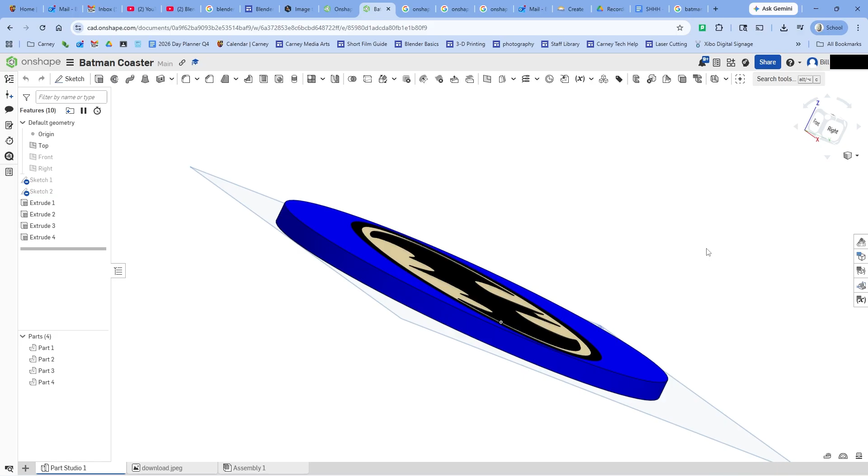All right, we're going to work on our first project inside of OnShape, and what we're going to do is create a Batman coaster. I've already got one here that I made so you can have a look at it. It's a pretty easy thing to do. I'm using the right mouse button just to move around. I can also click up here on top to get it back in the top mode, and you can see there's just a couple of extrusions and a couple of sketches. We'll go through what all that means in just a minute.

So let's go off back to the beginning here. I just clicked the OnShape menu up in the top left, and I'm going to click Create Document, Demo, Batman Coaster. All right, we'll click Create.

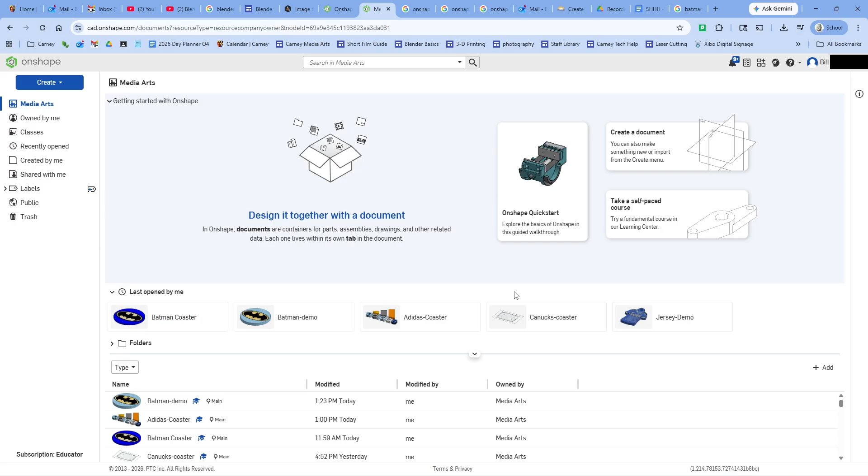So you can see we've got 3 planes that are highlighted here, and the first thing I'm going to do is draw a couple of lines. These are going to be construction lines, and you'll see why these are important in a few minutes. So I click the top, on the top right here, just so I can get in top view. If I right mouse button click, I can move around, but I want to just work in top view for a few minutes here. So I'm going to create a new sketch. Everything has to be associated with a sketch, and sketches must be associated with one of the 3 planes. I'm going to click on top, and now our sketch is ready to go.

You notice it's a totally different menu. So if I click the check mark and we go back to this mode where we can create new sketches, you can see what the menu looks like, but the menu changes as soon as I double click and go into a sketch. So this is basically our edit mode now.

I'm going to draw lines, 2 lines, and again, you're going to see why in a few minutes. Then I'm going to hit Escape, select the line tool again, and draw a line over here as well, drawing a line on top of lines. Then what I'm going to do is select those lines, and I'm going to click up here to turn them into construction lines. Notice how they have that sort of dotted appearance, looks like Morse code. I'll click that on both of them, and now I've got 2 X and Y type of construction lines that I can use.

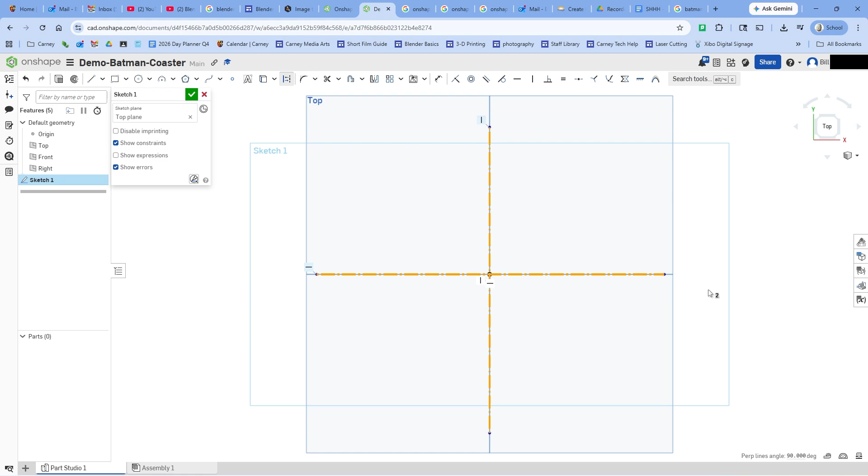Next thing I'm going to do is pull in an image, and the image, of course, is going to be the Batman symbol. So we click up here, Insert Image. And from within the image, there's nothing here yet. We need to import something. Menu appears, there's the Batman logo. And notice it doesn't actually appear here yet. Well, we need to select it, and then we need to drag where we want it, and we can move it around.

I'm going to want to get the size of this because I want to make about a 9 centimeter wide coaster. So this should be about maybe 8 centimeters, at least the image here should be. So I'm going to draw another construction line. I can actually move this up, I suppose, just so I don't get interfering lines. All right, you know what I could do is see if I can move the points on this one. Yeah, that makes way more sense.

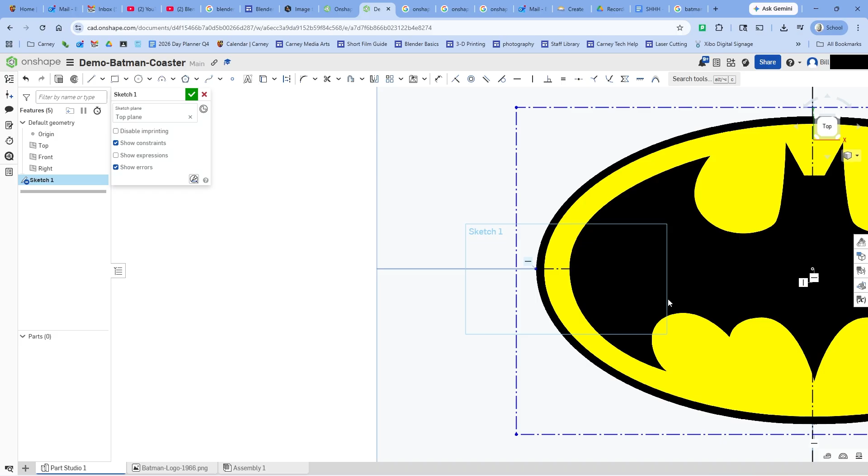Hit the space bar to deselect, you don't want them both selected. Okay, and you can see I need to move the image down most likely. I don't know, maybe right about there. And now we'll do a quick measurement. I could zoom in and try and get this a little bit better. I just hit the space bar to make sure nothing's selected. Okay, pull that one in. And I guess I should have checked to make sure that this is nicely aligned, which it is not. So that needs to be nearly perfectly aligned. That's going to matter, we'll see why in a few minutes.

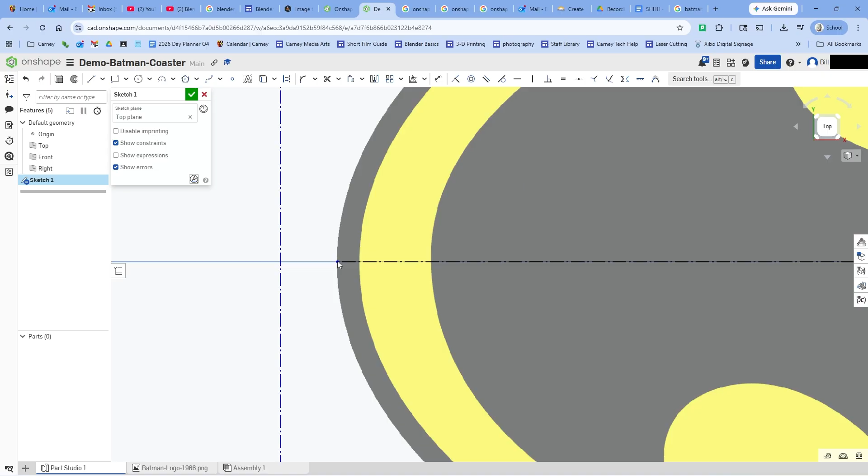Sorry, let's go back and just get these set. We'll get these set. That way we can do an accurate measurement for this thing. Spacebar first, and we'll move that point out. Okay, so we should be good. So let's do a measurement on that line, and what we do is we click on the dimension tool, select the line, and if we pull down, we can see it is set to 95 point. Let's make it 95.8, round up. That shouldn't really make much difference, not any sort of visible difference anyway.

All right, so we got to this point, and we want to now trace on top of this thing. This is looking pretty good. We know the dimensions, we've got the background set. But in order to do that, we want to create a new sketch.

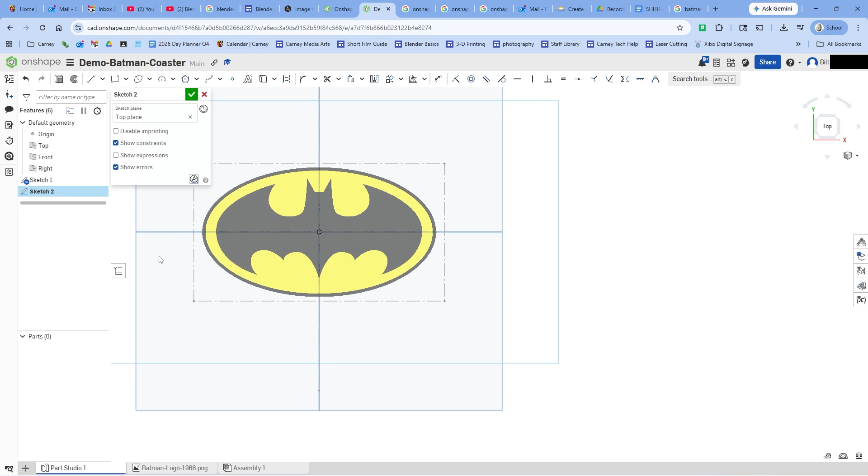The background is on one sketch. Our actual drawing is going to be on its own sketch, and that's important. So the next thing to do is we select a plane for this sketch. Same top plane again, and click OK.

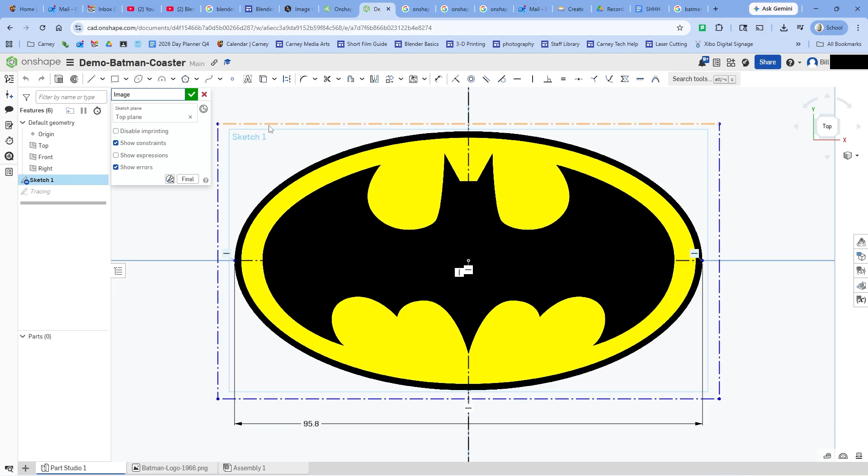Now you can see these are obviously ellipses, so we're going to double click, go back into that sketch. I could just call this tracing, or Batman, or something, I don't know. I'll click check. I'm going to double click this and just name this and call it image.

Tracing. I'm going to select the ellipse tool. You might have it set to center point circle, just click on it, you get a drop-down menu, select ellipse, start from the middle and drag out until we get to the end point. Then it'll give you another chance before you click to make an adjustment, and click. Okay, so we've got one done.

Let's make another. Click the ellipse tool, start in the middle, drag out to here, and try and get this as close as possible. Click again, and we've got our 2 ellipses done. That was pretty easy. We could get fancy here and have a look at the actual sizes and compare the difference to make sure our vertical and horizontal are correct.

So we can go out here, 51, 51.5. Okay, and then I'll select this one, drag it out, 54.3. Okay, so we can see we have a difference of, what is that, 1.8? Is that right, or is it 2.8? Yes.

So then I'm going to check this one, and I want to make sure that's not what I wanted, I want to check this one down here. So let's make sure we select the dimension tool, then click. All right, so we have 95.8. Oh, it didn't like that. Okay, let's just leave it 95.821. And we'll select this one, select the measurement tool. Oops, there we go.

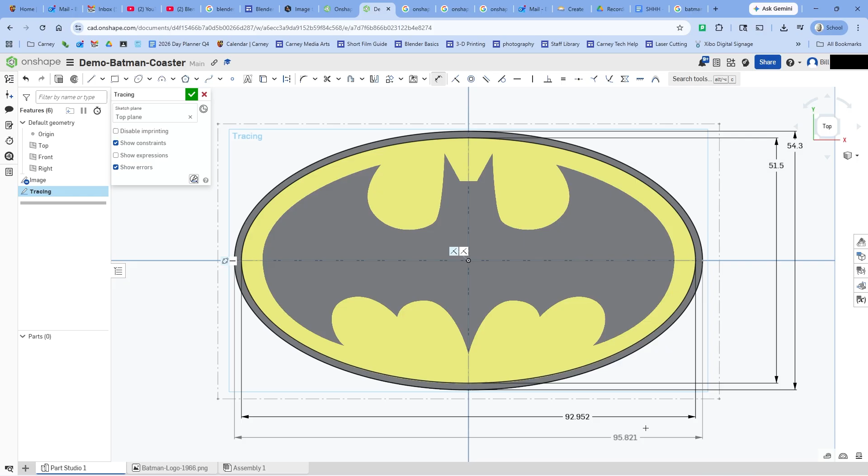And if we want to really be official about this, we should see the same difference between these two, and we can make adjustments so that they're roughly or exactly the same. I'm not going to get into that much detail right now, though.

Next thing we want to do is trace over the Batman symbol. To do that, we click on Spline. I'm going to go here to Spline, click here, and just follow the outline. You can see it doesn't need to be perfect, we can always come back and change these anyway.

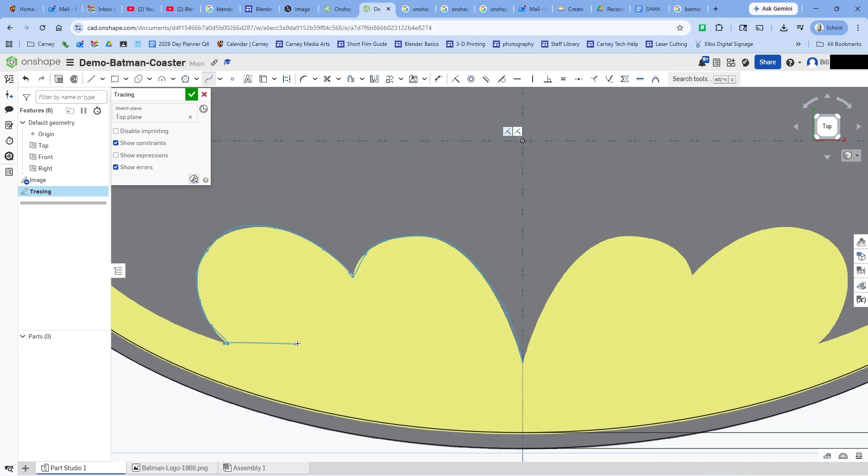If you put 2 close together, you can sometimes kind of fix it. What we really need to do is convert that to a point. Shift middle mouse lets us move. You can see as you go around the curve, it causes the previous curve to kind of bend, which is nice. Shift middle mouse again.

I want to go fairly quickly here, we just want to get this done. Okay, it doesn't need to be perfect. And again, a point quite close to the previous one. We don't need too many points on this.

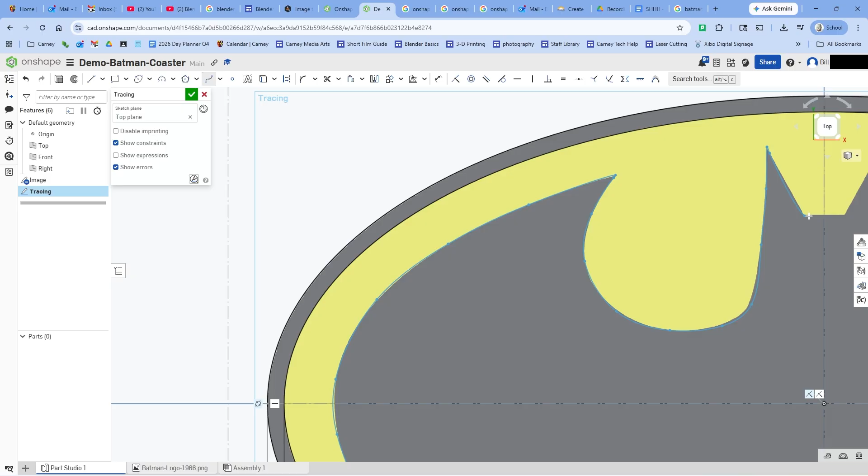The good news is we're almost done because we only need to do half of this. If you notice, it's symmetrical, obviously. Another point there and here. Hit escape, and we've got it drawn.

The only thing is I do want to clean up some of these points. I'm going to hit escape here, select it again, and we should be able to move these points. If there's a few points that are really bothering you, this would be the chance to clean those up. Let's see, is there any other? Most of these look pretty good. Yeah, maybe we'll shift that one a little bit, swing him down a bit.

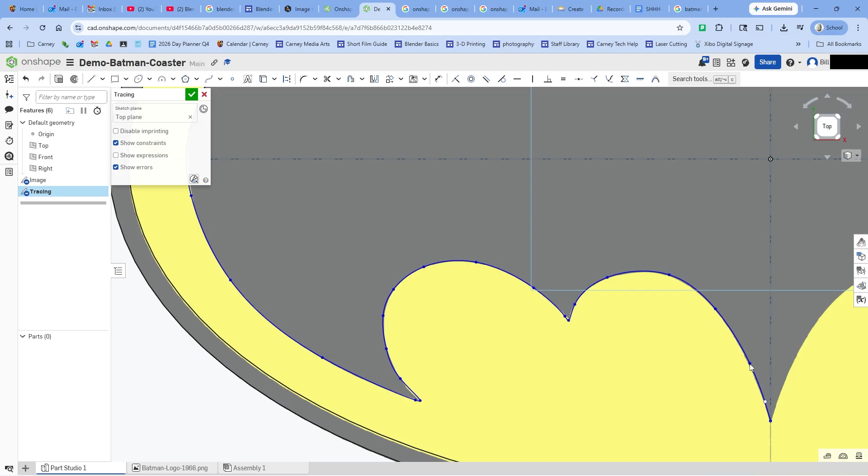Okay, and I mean, you can get really picky if you want to. I'm just going to leave it like that, it's good enough. Okay, so what's next?

Well, this is kind of cool. What we'll do next is use the mirror tool, and it says select a mirror line. So the line that we're going to use as a mirror is going to be this axis down the middle. Then select, oops, there we go. Select entities to be mirrored, it's going to be this line here. We click it, and look at that, we're done. Okay, just like that, it's awesome.

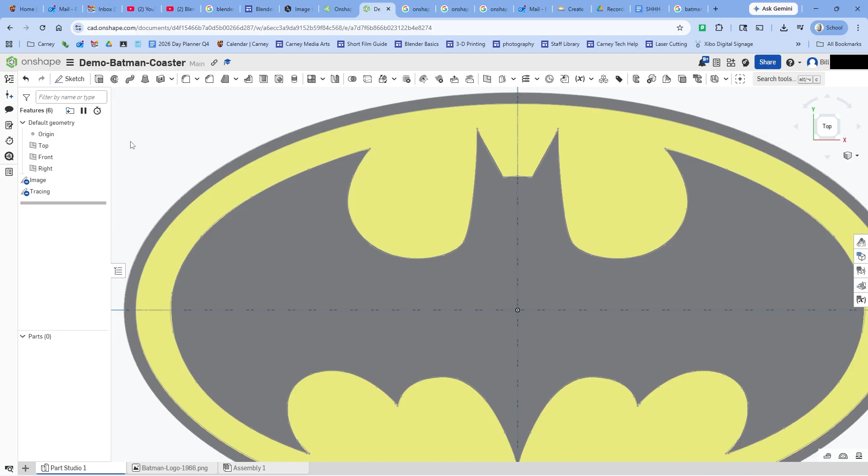Now we can actually, I'm going to click the check mark, go back to image. We're going to hide the image, we don't need that anymore. And we've got our tracing done. This is quite awesome, actually.

We could also delete or hide these axes, we don't need those. So actually, I'll just show you what that looks like, that's the planes that show up.

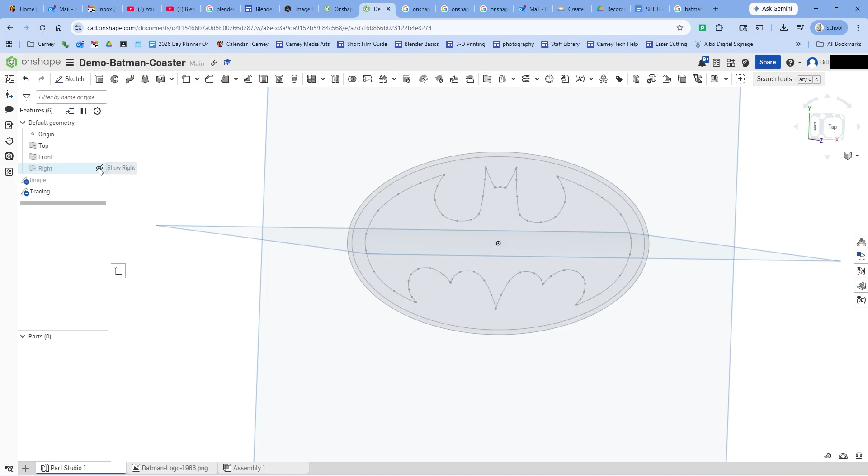I'll use the spacebar to deselect everything. If I click hide here, it simplifies things so all we see is just a top plane. I'm going back to the top view and zooming in a bit, and now we're going to have some fun.

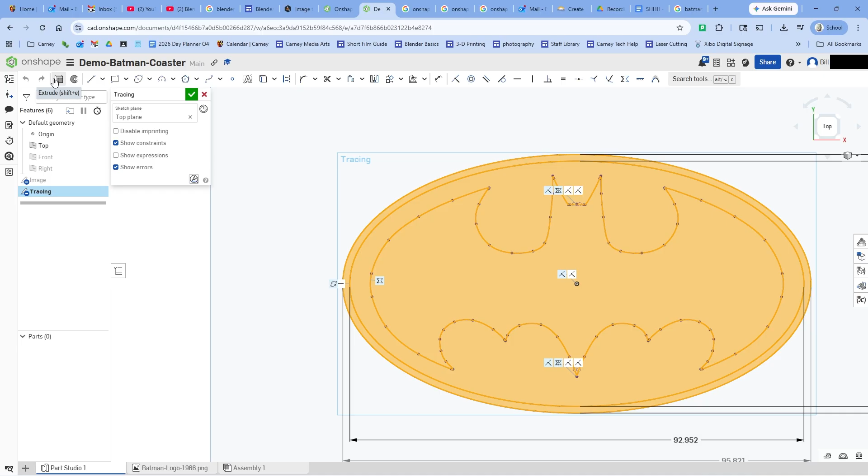We're going to turn this into a three-dimensional object. To do that, we go back into our tracing sketch and select what we want to extrude. I'm going to select everything and extrude the whole thing - you'll see why in a few minutes. I'll click the extrude button, and we want to go 5 millimeters.

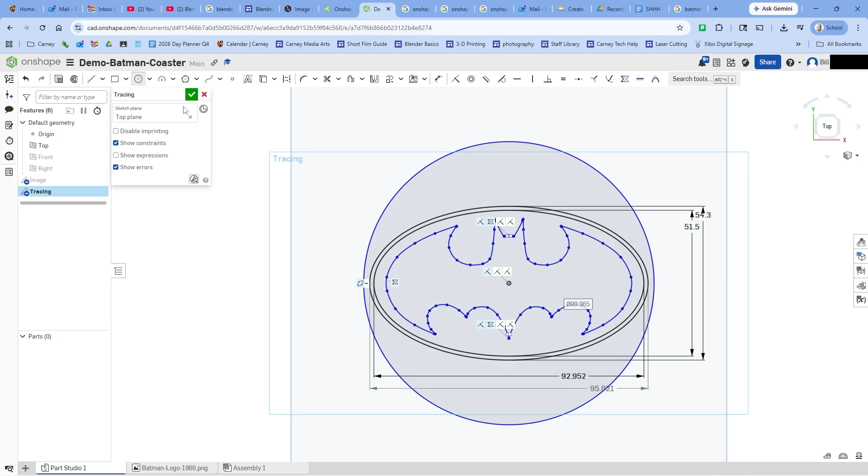Now what I want to do is the extrusion. I'm going to select all of it, click the check mark, go back into tracing, and select the areas. You can see there are 1, 2, 3, 4 separate areas, all selected. I go to sideways view using the right mouse button, and we're going to extrude. Once they extrude at 25 millimeters, I'm just going to do 5. We'll click the check mark, and we've got the thing done.

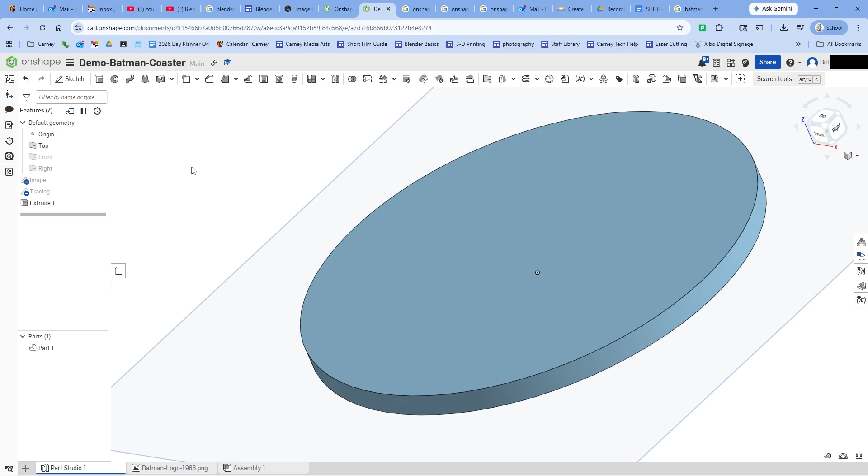Now we've lost our Batman symbol - don't get nervous. We'll go back to tracing, and now what we're going to do is extrude on top of this. I want the Batman symbol to show up, so I'm going to click on it first, then go extrude again. Okay, and now look at it sticking right out of it.

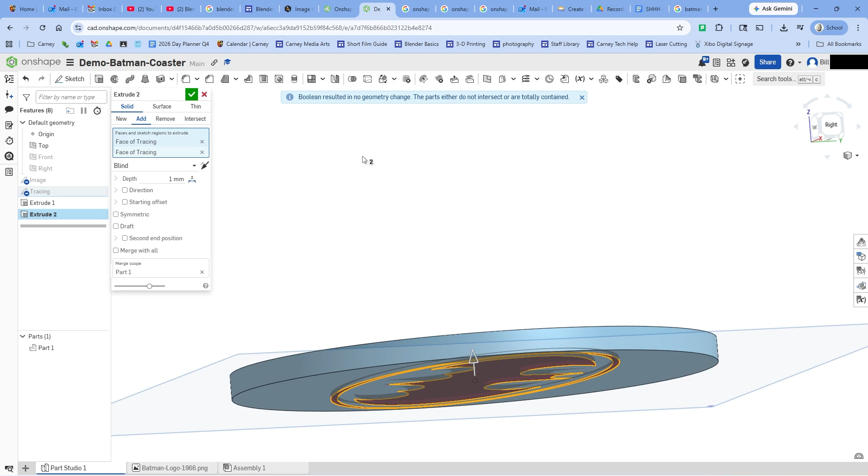It defaults always to 25 millimeters. I only want this to be 1 millimeter high, but it starts from 0 - that's going to be a problem, it's going to be embedded and we won't be able to see it. So we click starting offset, which again defaults to 25. We're going to set that to 5, and now it just sits right on top, and that looks awesome.

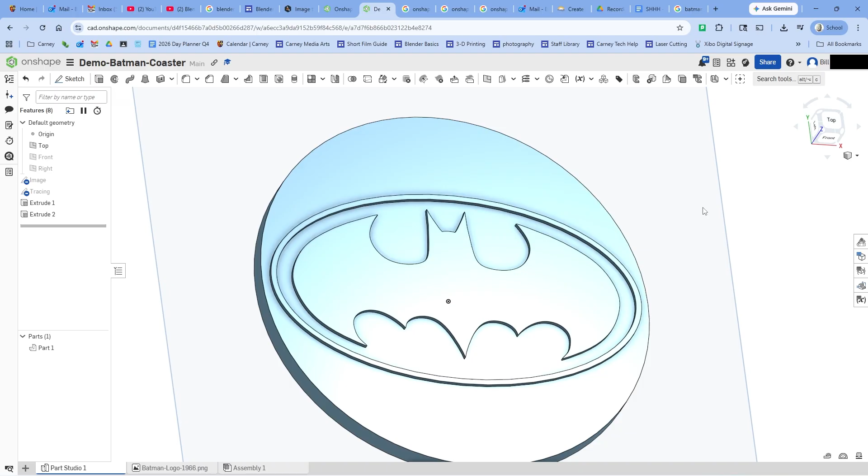Only thing is, if I go back to top view - only problem here is if we put a cup on that, it's going to be kind of tippy. So let's go back into tracing our sketch, and we need to extrude this area and this area. I'm going to do them separately because I want this to be yellow. I click the extrude button again - defaults to this - I'm going to go 1 millimeter, and remember we need a starting offset of 5, and that will place it on top.

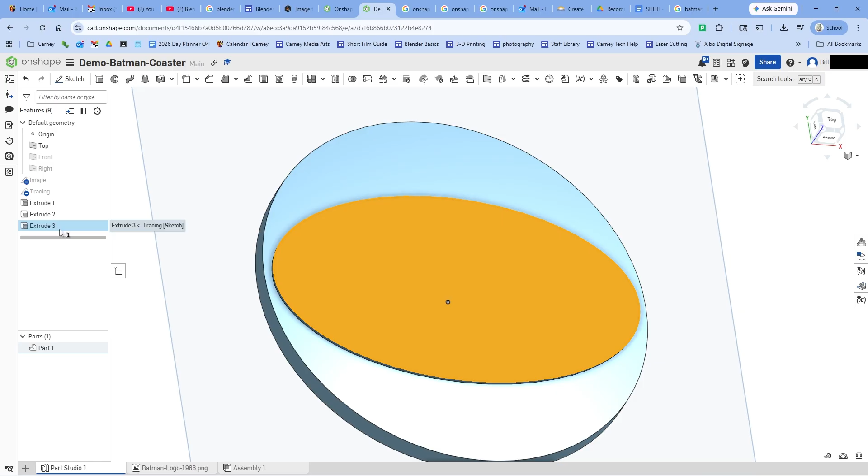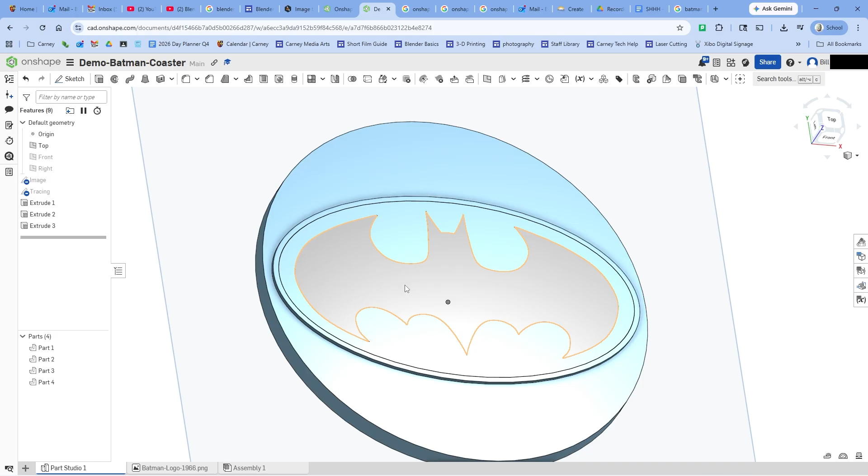Click the check mark, and I must have done something wrong because we lost everything. Okay, let's have a look - depth 1 millimeter, stop. We want to click new, that's important. I don't know if I actually did that with this extrude, so let's go back. The Batman symbol - yep, I did. Okay, sorry, that's this one here. I did not click new, so we need that to be new. That's important - there, now we've got an actual part here that we can work with.

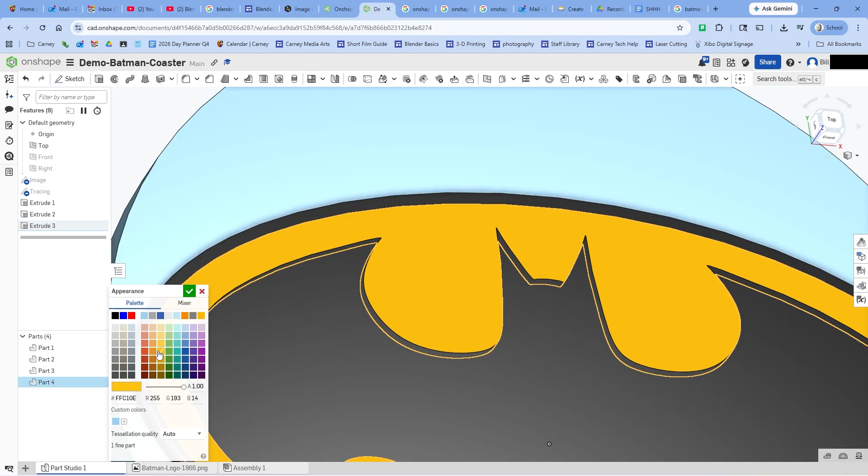Okay, so I'm going to select this and this, and you can see it selects part 2 and 3 down here. We can right click and go edit appearance for 2 parts, and I'm going to make them black. Click the check mark. We've also got this piece here, which is part 4. I'm going to edit appearance and make it a yellow color, as close to yellow as I can. Okay, just check it off - that looks okay.

Okay, now we've got one little problem - we still have to extrude the outside of this. How do we do that? Well, simple, we go back to tracing, select just the outside piece, click extrude, and set it to 1.

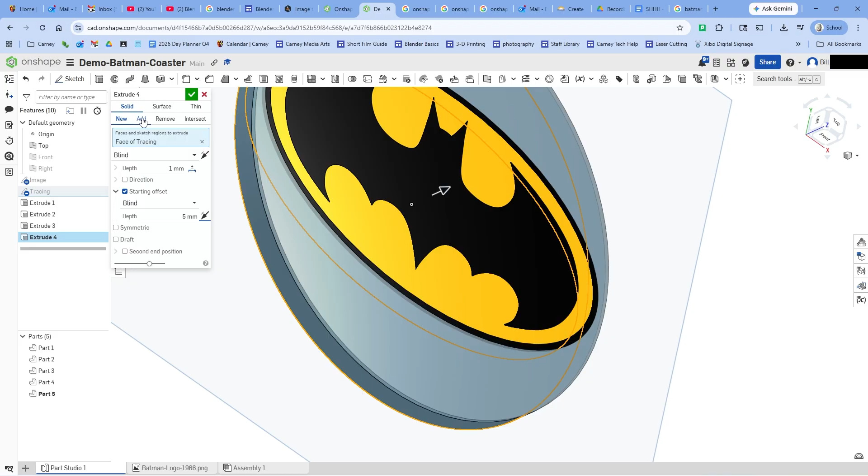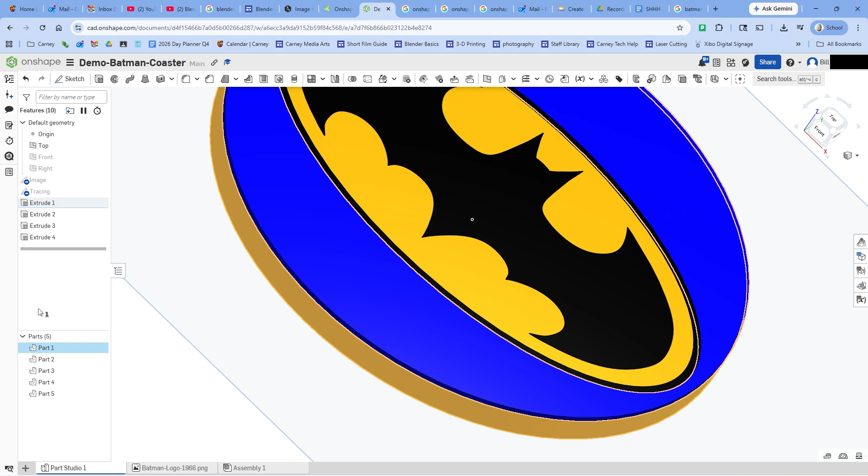We set this to offset, starting offset to 5, and now we can go add - we're just going to add on to what was already there. Oh, it won't let us do that, we'll just click new, that's okay, as long as we set it to the same color we should be okay. It looks like it's defaulting to that color anyway. We'll select it, right click, go edit appearance, and it looks like it's assigned the same blue. Just to show you though, we can select that blue, then go to part 1, right click, edit appearance, and make it that same navy blue. And now we've got this thing done.